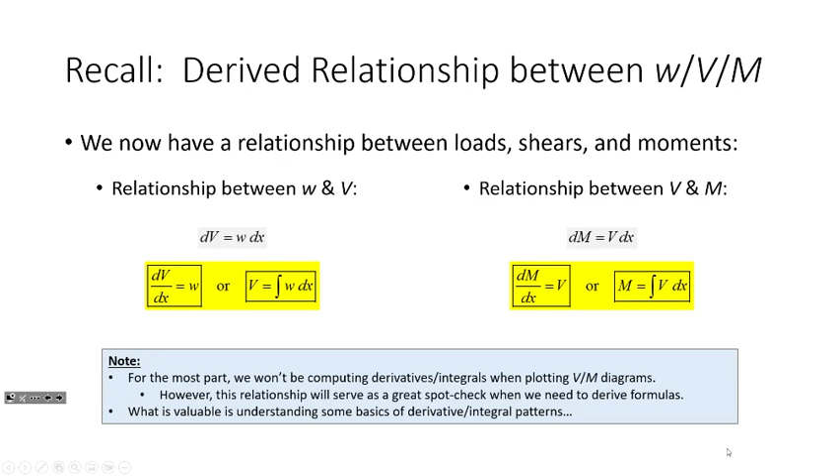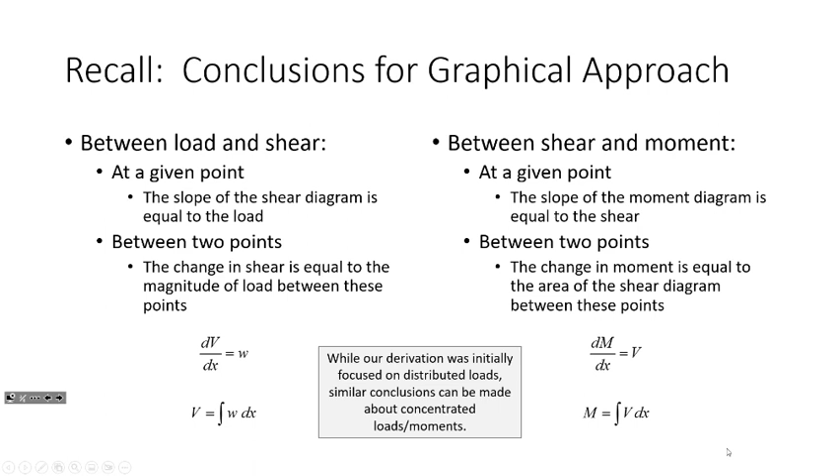Just to make sure we're clear, what we derived was a relationship between load, shear, and moment. The change in shear is equal to the magnitude of the load, or flipping that around, if we want to find the shear, we integrate the load diagram. Same way with shear and moment: the change in moment is equal to the shear, or if we want to find the moment, we integrate the shear. These are the conclusions for the graphical approach we used last lecture, where we went from constant to linear, or constant shear diagram to linear moment diagram, etc.

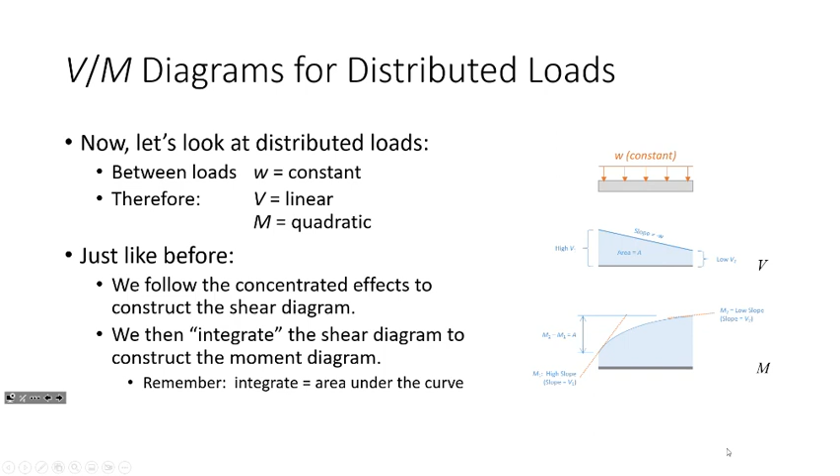What I want to do today is ramp it up and look at distributed loads. Remember, we use that integral relationship, and now we're going to extend it one degree further. So if I have a constant load, I want to investigate this image a little bit because I think it's kind of important. Let me hit escape here because I want to zoom in and make sure the notation is coming through pretty clearly.

Let's first look at the relationship between load and shear. So I have a constant shear, or constant load. Let's think about that from an integral perspective. If I have the integral of 7, what is the integral of 7? It's 7x, right? If I have the integral of 93, it's 93x.

The integral of a constant is a line. Notice how I was very particular in constructing these schematics: we have a constant load, linear shear diagram, but the slope is negative. The slope is going down because the load is going down, so mathematically we treat that as a negative load, resulting in a negative slope.

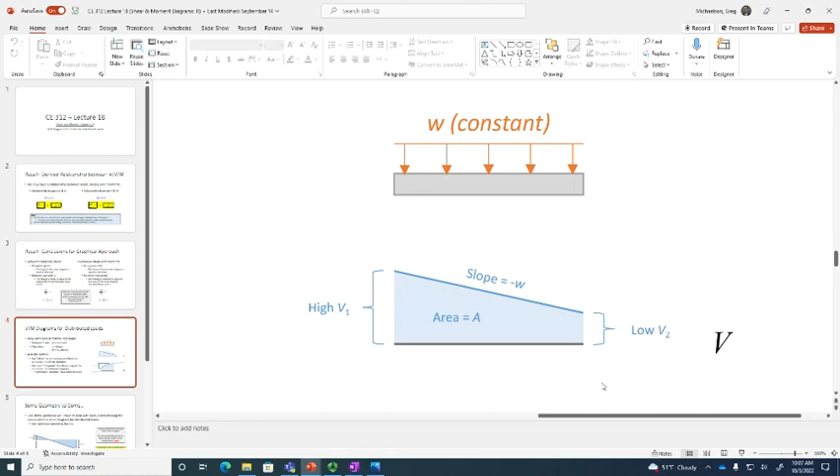So, a negative slope on our shear diagram. Taking that one step further, we go from a region of high shear to a region of low shear. That means if we take a line and integrate it, we get a parabola. So our moment diagram will look something like this.

Let's investigate this a little bit. Let me zoom out so I can capture the whole thing. First off, we go from a line to a parabola because that's how our integral relationship works. If I take the integral of 2x plus 3, I get x squared plus 3x plus something. So going from a line goes to a parabola.

Let's look at the slopes. We have a high shear to a low shear, so we have a high slope to a low slope. Sometimes you'll hear me use the term 'a lot to a little' - a lot of slope to a little slope. It's because there's a high value of shear, there's a high value of slope on the moment diagram.

We have a parabola. Notice how that parabola is opening downwards. It's opening downwards because we have that negative slope on the shear diagram.

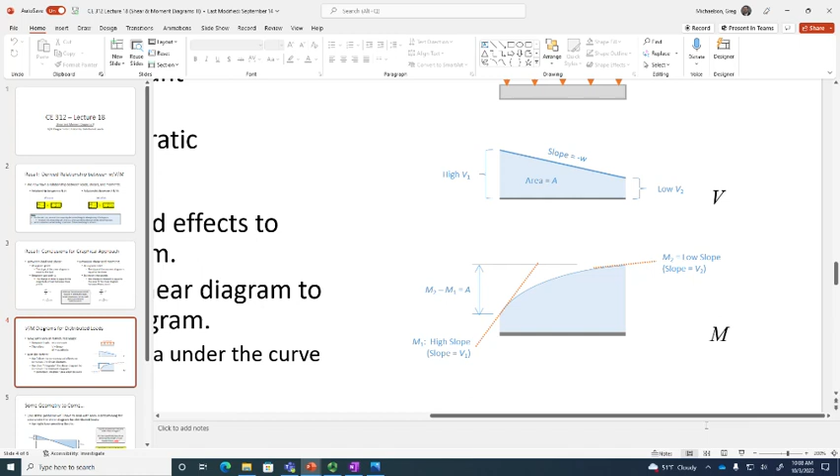So, as for the change in moment from point A to point B, that equals the area under the shear diagram - again, just integrating. A lot of these patterns are directly derived from what we've looked at before. Don't worry, we're going to go through this with some detailed examples here in a bit. Okay, so far so good?

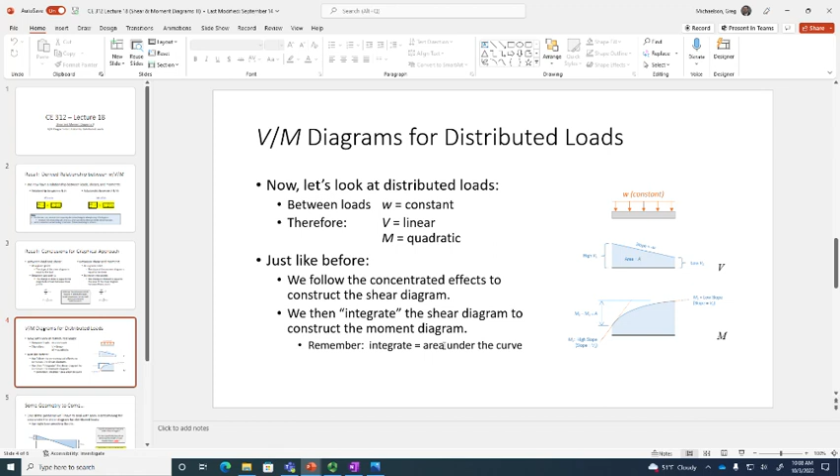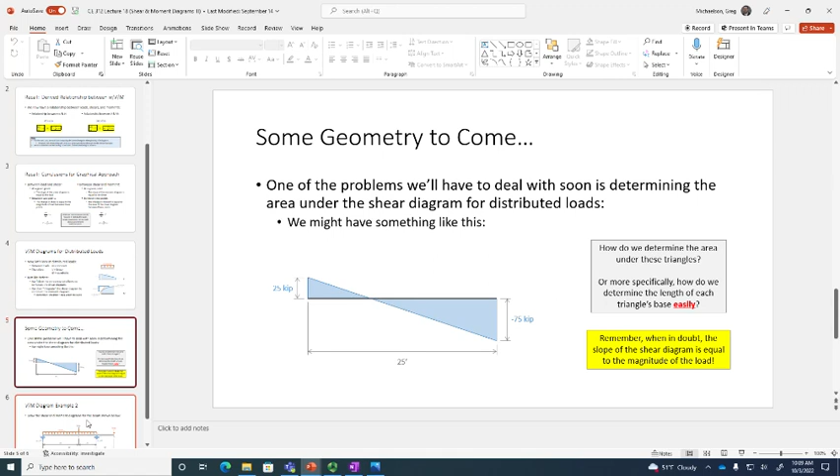Now, what I've found when I teach this topic is that there's some geometry we need to deal with. I want to look at this geometry off to the side, because we're going to have this problem come up - it's actually going to come up in the problem we're about to do. I want to make sure we're not going to get tripped up on the little stuff and lose sight of the big picture, so let's investigate it off to the side.

Let's say we have a shear diagram region that looks something like this, and this is all you know. I need to determine the area under these regions. This is going to happen - you're drawing a shear diagram and you go from 25 kips to negative 75 kips, and now you need to determine the area of the shear diagram without knowing these distances. So how do you do that?

I want to make sure that's comfortable. This isn't difficult or very challenging, but I don't want to lose sight of just the construction of the shear moment diagrams while we figure this stuff out. So I'll show you a couple of simple ways of going about this. First, I'm going to compute the slope of this diagonal line.

I'm going to treat this like a basic graphing problem - the change in y over the change in x. Why did I say change in y? Let's look at this from, and let's be diligent from a units perspective, because you'll see what happens here in a second.

So for change in y, we'll take 25 kips minus negative 75 kips, over 0 feet minus 25 feet - however you want to do it if you want to be diligent from the math perspective. The coordinates of this point are 0, 25; the coordinates of this point are 25, negative 75. So on the top we get 100 kips, and on the bottom we get negative 25 feet, or negative 4 kips per foot.

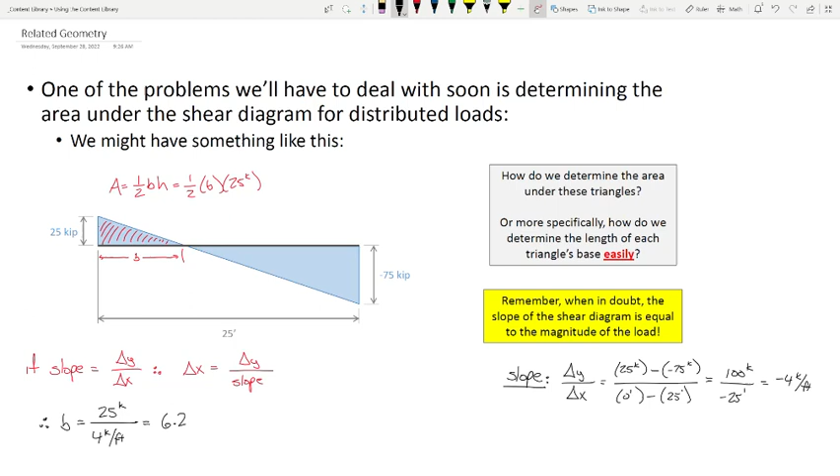The easiest way to determine that distance is to use our fundamental expression: slope equals change in y over change in x, so change in x is change in y over the slope. So if you want a simple way of determining B, just take 25 kips, divide it by 4 kips per foot. That's it. Does that make sense?

So if we wanted this dimension here, we would take 25 over 4 kips per foot, so this equals 6.25 feet. So this is 1/2 times 6.25 feet times 25 kips, equals... 78.125 foot kips.

So that's the area under the shear diagram right here. And if you want the area under this other shear diagram, this dimension right here is 75 over 4, which is 18.75. And so this area is 1/2 times 18.75 feet times 75 kips, which is 703.125. Does that make sense? I don't want the geometry to trip you up with what we're about to do, I want that part to be simple.

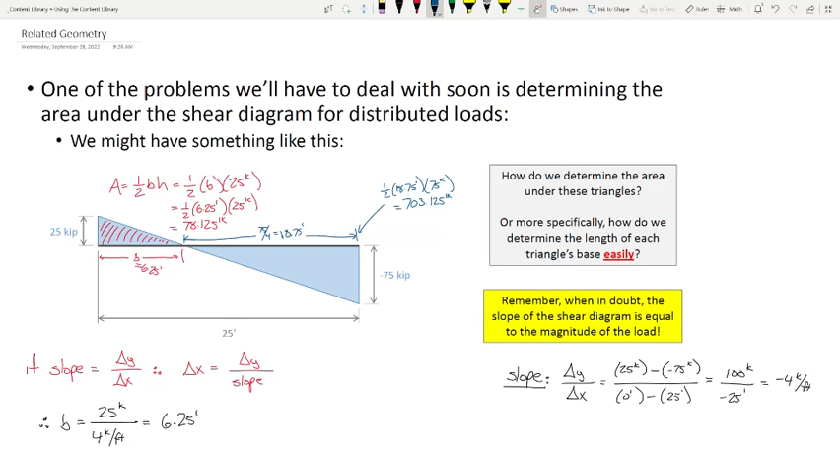Any questions? All right, I want to spend the remainder of lecture on a problem, and I want to take what we've done so far and ramp it up a little bit. So I would like to look at this problem.

Notice what I didn't give you on this problem: I didn't give you the support reactions. Because I'm a meanie, that's weak, isn't it? I'm doing that on purpose, though. I'm doing that on purpose for this problem because I want us to have an inherent understanding of what these reactions are and how they feed into the checks and balances on the moment diagram we're about to construct. So for the purposes of learning this topic, I'm sorry, we need to compute them, okay?

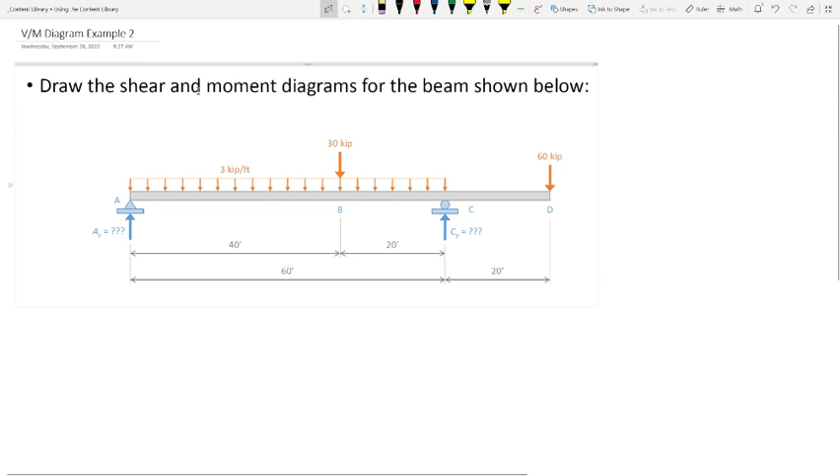So we are going to take our time and compute these reactions. Now I'm squunching my beam a little bit over here because what I'm going to do is do my computations over here, and then draw the diagrams over here, so hopefully I can squunch all that together. Now I want to do this problem the way I think you're going to do it on your homework assignment, okay?

And how you're going to do it on exams. I want to fully embrace the potential errors that you're going to encounter and deal with them head on. I don't want to scooch them off to the side, okay?

Let's handle this. The first thing we need to do is compute these support reactions. Whenever we were computing support reactions before, what would we do with the distributed load? We would collapse that into a single point load, right? I have 3 kips per foot over a distance of 60 feet. So I can collapse that into a single point load of how much?

180. And that's probably going to be somewhere about there. How far from A is that going to be? 30 feet. If that's too small, or if there's anything illegible, let me know. I'm trying to make it big enough to where you can see it.

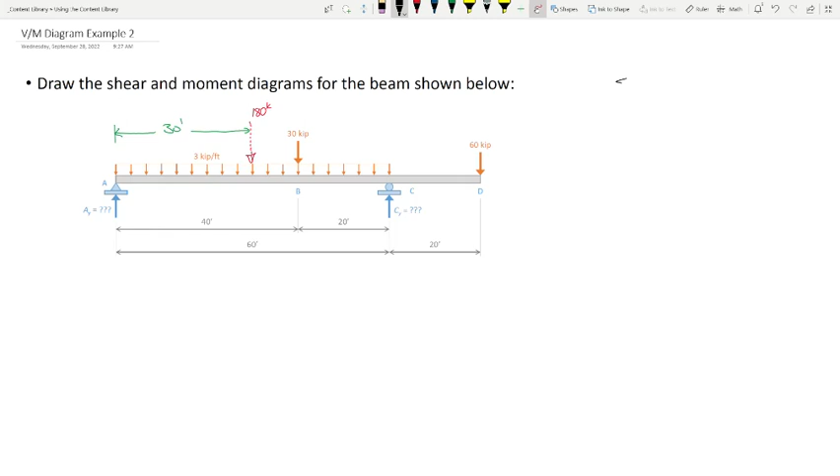So what I'm going to do is handle this like I would any problem. I'm going to sum moments at A. Actually, hold on, let's be formal about it. Let's recognize that summing forces in the x direction, we know that AX is 0.

Now let's sum moments about point A. So we've got 180 times 30, 30 times 40, 60 times what? What's the moment arm for this point? From summing moments from A, what's the moment arm for this load right here? 80. Exactly right.

And the only thing resisting that is going to be Cy times a moment arm of 60. So what do we got? We've got 5,400. 1,200, 4,800, 11,400. So 11,400 divided by 60.

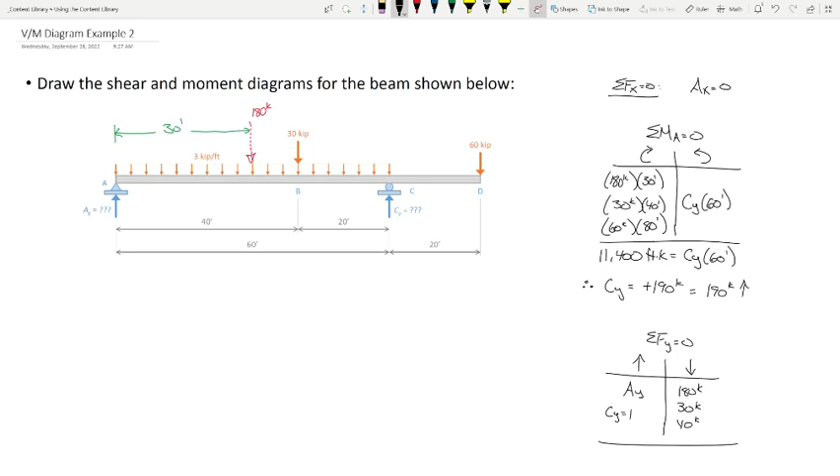Now what is that? I might need some help on that. 190. So Cy is plus 190, or 190 kips going up. And so if I sum forces in the y direction, I got 180 down, 30 down, 40 down, and I got AY up, CY is 190 up. So AY plus 190 is 180, 30, 40... 270.

Well, hold on. So 180 down, 30 down, 60 down. 180, 30, and 60. So 30 and 60 is 90, 180, 270. That's 180... 80. Oh yeah, my bad. Is it right? Yeah. I'm hearing a second opinion, so we're going with it. We'll find out if it's wrong here in a second.

Let's give everybody a sec to catch up, and then we'll move on. While everybody's catching up, let's draw some guidelines here. Normally what I like to do when I'm drawing these things is, at a minimum, draw them under all the letters, because if they were important enough to be named, they're important enough to be considered in my analysis.

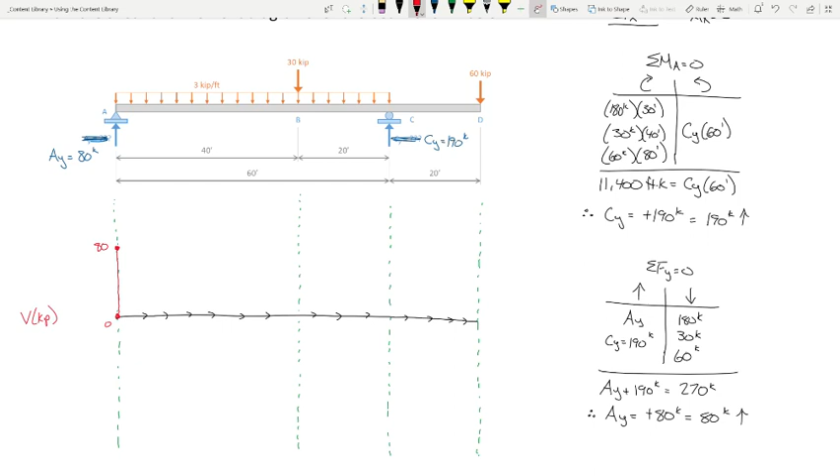40 feet. So how much load is that in this 40-foot region? 40 feet, 3 kips per foot. How much load is that? 120? Yeah. So if I'm at 80 and I drop down 120, that puts me at about -40. So the shear diagram should look like that.

-40. Well, by golly gosh gee, it's like that geometry problem I mentioned a second ago where we're going to have to integrate. I didn't want that to be a problem, so that's why we did it off to the side. Now I'm at -40. What do I do? Down another 30, to put me at -70.

Now I'm at -70. What do I do from B to C? Keep going down. Exactly. So if I'm at -70, how much do I drop? Is it a magnitude of 60 or -60? Because it's 3 kips per foot over a distance of 20 feet. So if I'm at -70, I drop down another 60. That puts me at -130.

-130. Then what happens here? Whoo, massive jump upwards, right? Because we got a huge reaction there at C, 190 kips. So if I'm at -130 and I jump up 190, that puts me at what? Positive 60. So that's probably going to be about like that.

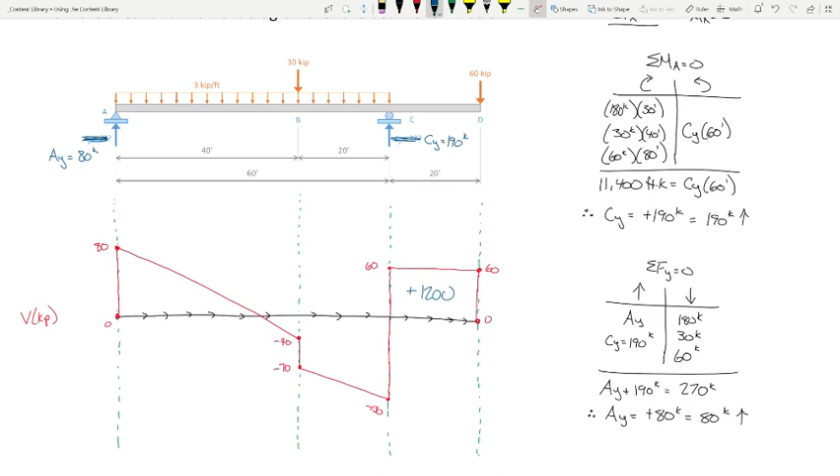That's exactly right. All right, now let's look at this region. I'm going to show you a little shortcut, okay? I could take this region right here and handle it two different ways. One way is to split it up into a rectangle and a triangle and compute each separately. Here's another way of handling it. Let me scroll down a little bit. I'll say note.

There's a name in geometry for that shape. We call that a trapezoid. And the area of a trapezoid can be found by taking the base times the average of the heights. Because essentially what you're doing is you're saying, I'm going to knock off that little triangle right there, and I'm going to stick it right there. And so then it just becomes a rectangle. And how do you find that height? You just average this and this. So that little bit goes over there.

So if I want to find the area of this region right here, what is the average of 70 and 130? 100. How wide is it? 20. This is negative 2,000. Does that make sense? So that's a little shortcut there for you.

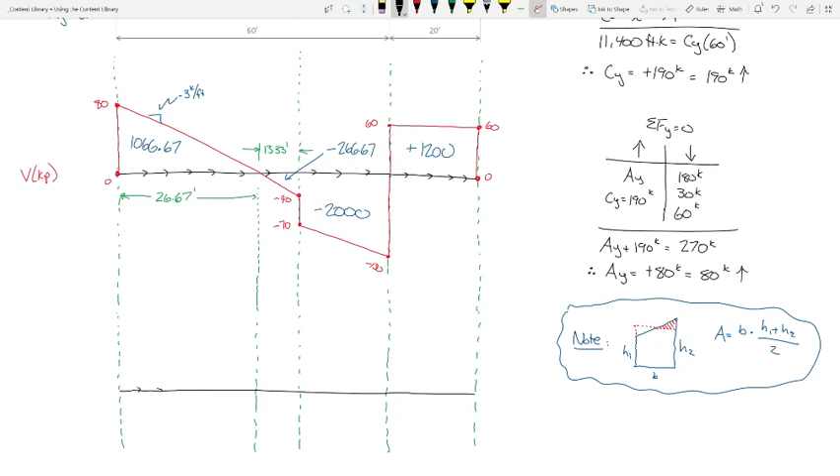All right, let me scroll down a little bit so I'm not scrunched down at the bottom of the screen. And I want to wait for everybody to catch up with me on this because I want to show you a simple way of getting this right. I still see some folks drawing this stuff out, so this is totally fine. Take your time.

All right, now help me out. So the new stuff with today is just the shape of the moment diagram. We can handle the construction in the same way we did before, so the shape is a little different. Let me explain what I mean by that.

So let's start off indicating 0 right here at the bottom. And let's see what happens from region to region solely from a rises and falls standpoint. In other words, from here to here, I'm going to start at 0 and go up 1066.67. Okay? I don't know yet, or I know, but we haven't yet plotted it out. But would you agree from here to here, that's how much we're going to go up? Okay, from here to here, if I'm at 1066.67 and I drop down this much, what does that put me at? 800. So this is probably going to be 800.

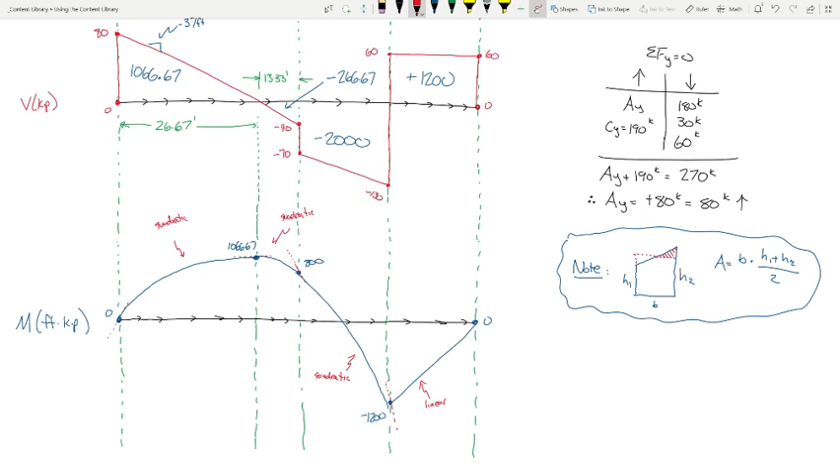Yes? Why was there no consideration for the negative 70 kips on the shear diagram, right here? Okay, so there was, and my artwork is horrible, I'll show you why. Let me do my best. That's a really good question.

So what's happening right here is there's two parabolas. I'm going to do my absolute best to draw this out. There's a parabola over here that's sort of stopping like that, and at that point it has a slope of negative 40. Then there's a new parabola that's sort of starting like that, with a slope of negative 70.

That's a really good question. My art is just absolutely horrendous. Let me answer that with an addendum: this is the type of thing that's going to be easier to understand and see if we plot it with software, because the software will handle that and our artistic skills won't matter. That's a really good question.

All right, any questions? All right, laptops on Wednesday if you can, because we're going to use some Excel to construct some shear moment diagrams. We're going to find a spot where this graphical method breaks down.